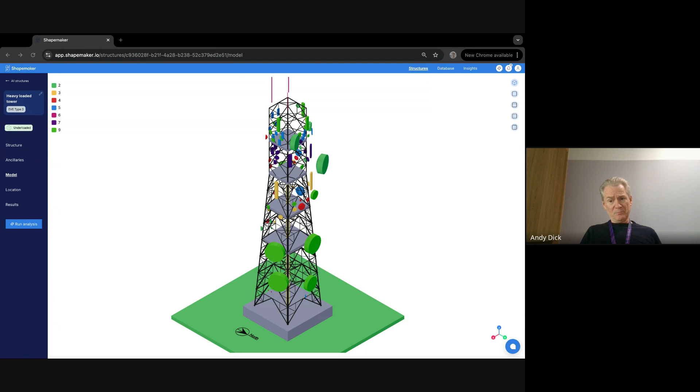So Telia Towers Sweden and Telia Towers Finland have the legacy towers portfolio from when it was a state monopoly. We're a little different here in Telia Towers Norway, because Telia bought Netcom, which was a pure mobile operator. They started in the late 90s building out 2G, perhaps 1G, but definitely 2G technology. So most of the towers that we have are typically under 30 years of age. My background is in radio electronics. I started building towers about 30 years ago, and I've been working with Telia Towers Norway now for a little bit over 2 years.

Perfect. We started with Telia Towers Norway in 2023, as far as I remember, and then recently we expanded to other countries, Sweden and Finland, correct? Yep. So we had some years already in collaboration with each other. Could you please tell us about previous engineering processes before we started our partnership? What did they look like, and what kind of challenges did you have at that time?

Previously, all of our tower documentation was in CAD drawings, and CAD is a very, very useful tool. It's great if you're going to build a car and design it from the ground up. But if you want to be recording where you place antennas on a tower, it's probably a little bit of overkill. You don't need to know to a degree of millimeters where something is placed in a tower. When a contractor installs something, they might be plus or minus 10 or 20 centimeters from where you've assigned them. So that level of detail is unnecessary.

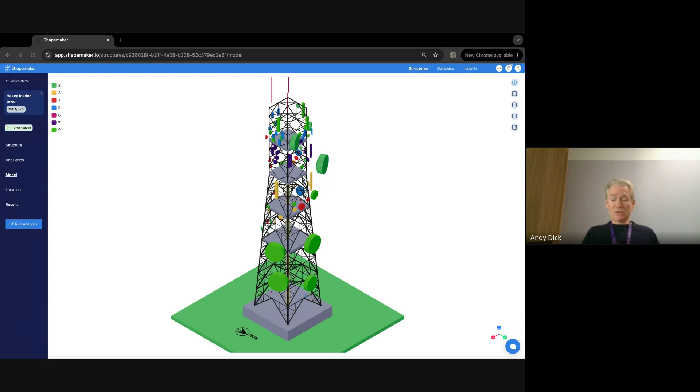When we had strength calculations done, they were done by a local engineering consultancy, and they would deliver a report in PDF format. So then we had DWG files and PDF files, which aren't really useful. They're great when you actually look at that particular project. But if you want to use it as information going forward in modern systems, it's not really useful for us. Correct.

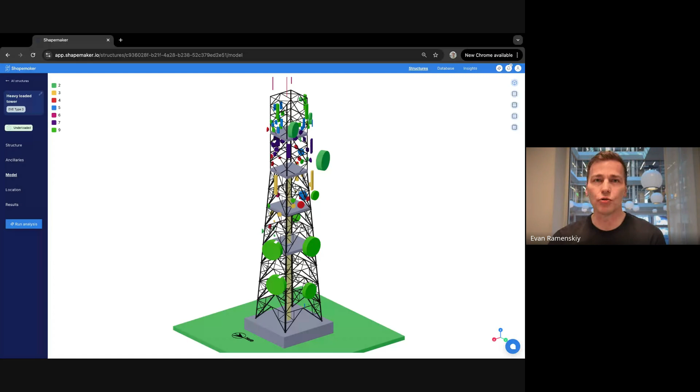Yes, and that's why I was sharing the Shapemaker platform screen with a digital twin that I just opened up. Basically, as you were saying, Andy, in the past the process was quite manual with all this DWG and PDF documentation, and now I'm going to show this digital twin with all these antennas with different tenants marked in different colors right here, and ancillaries or antenna data is shown.

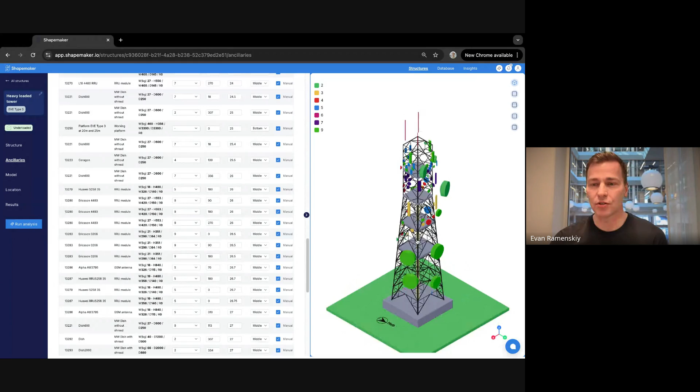The antenna list is kind of digitized on this digital twin, as you can see here. A huge list of very busy, very nice looking structure,

but the impact of the Shapemaker platform when we shifted from this manual digital solution to Shapemaker platform, and also I was wondering what was the impact not only on the company but also on the team? What kind of team you had, and you mentioned that you were outsourcing your engineering calculations to a consultancy, a third-party company. What is the setup now? What is the impact of Shapemaker right now?

One of the challenges we faced at the time that I started was that two of the main mobile network operators here in Norway were involved in 5G upgrades. And as part of that, there were a lot of requests to do strength calculations on these towers. So we were seeing that when we sent an order for a strength calculation, it would take typically 6 weeks before we would get a calculation.

And what we want to do is be very responsive to our customers. So when they send us an inquiry about something, we want to give them an answer within 1 or 2 days, if they can have what they want and how much it's going to cost them. The faster we can be responsive to them, the sooner we can get them actually installed in one of our towers. So that was one of the big changes for us. The advantage with Shapemaker is you don't need to be an engineer to do it.

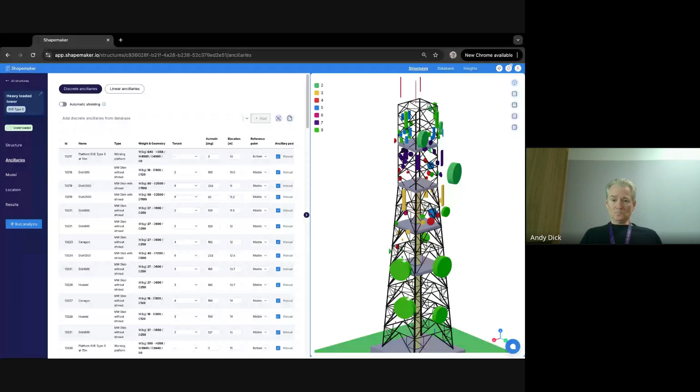Sounds cool. I really like what you said, Andy, from weeks or months down to basically days or sometimes even minutes. It's very good feedback for us to see, using Shapemaker, cutting down the collocation applications and engineering calculations basically down to days, responding to your end clients in days instead of weeks and months. I think it's a big impact on the business itself.

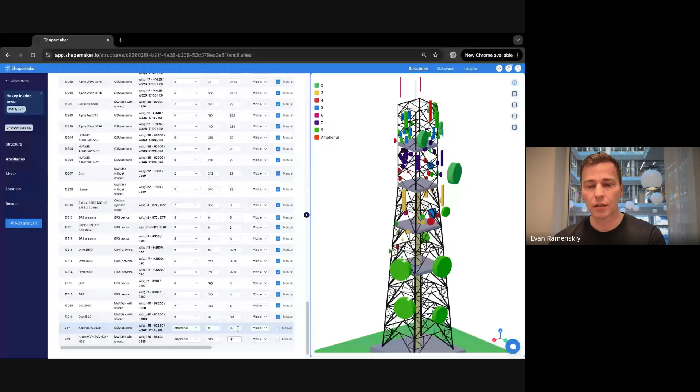And maybe I can briefly show. So this is our antenna tab in our software. What you see here is a 3D model, and we have an ancillary database which you can search and pick an antenna. For example, this type. Let's say we are applying 2 different antennas as a collocation request. We add it to the structure, then it comes into the list at the bottom, and you just need to assign the tenant name, azimuth, and the elevation. And of course, we have all sorts of additional ways of adjusting this ancillary.

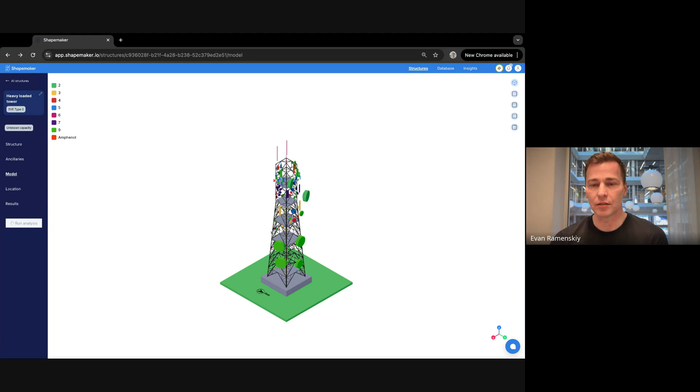And I can even run this calculation, and you will see while we are talking, it will take basically seconds. So that's what you just highlighted. I just want to show how easy it is. And in addition, Shapemaker is API-ready software, so even this ancillary can be implemented not by hand, but through API integration with other internal or external platforms. So a very interesting overview that you highlighted, Andy.

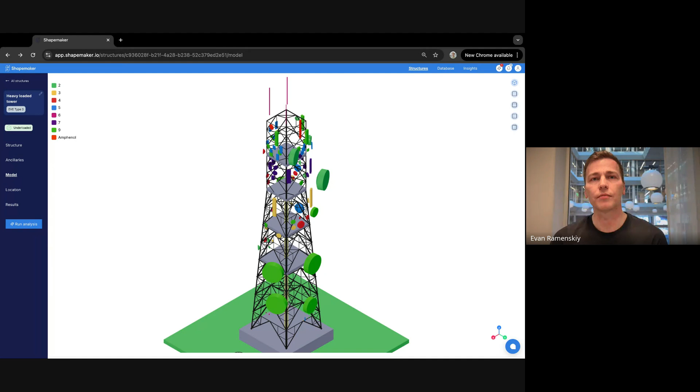And okay, so the time has been reduced dramatically, answering these requests and building new structures or updating existing ones. But how did it impact the business, and have some business metrics been improved? If you can just in general highlight some business metrics improvement in Telia. I think one of the most important benefits for our customers is that we're more responsive to them. We can give them an answer much quicker than we could before.

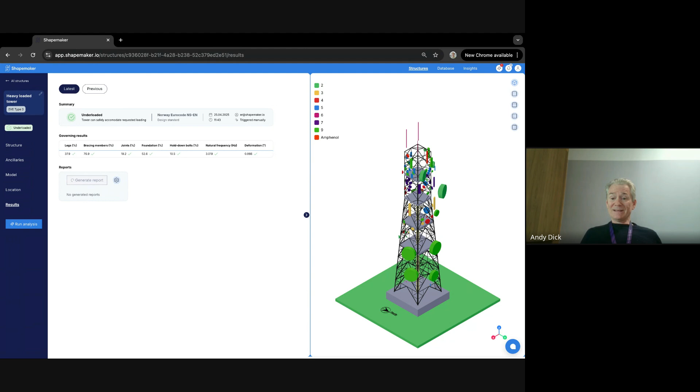What are the other benefits? Well, I mean, we have better information about where our equipment is. One of the challenges in a tower company is that if there is an antenna installed that is in the wrong place and you haven't identified that, you might offer that space to a customer.

Now they go out, they go to install it, then there is waiting time, finding out maybe from the subcontractor back to the customer and back to us, hey, what are we going to do about this? And this is a financial loss to the customer. So if we can eliminate that by having a better overview of what we have on our towers, that's going to translate into lower costs for our customers as well. Mm-hmm. Correct. That's very good.

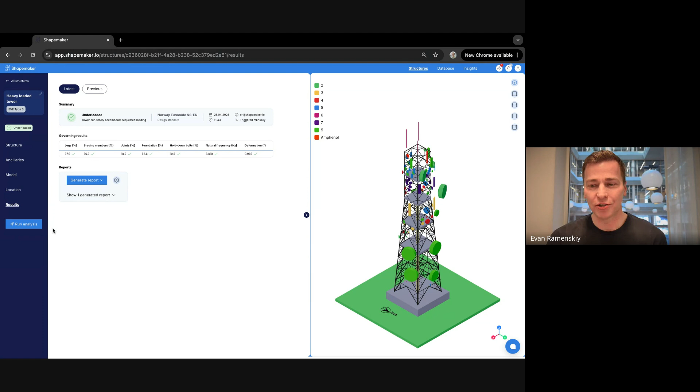And while you were talking, I ran this analysis, basically a full, complete structural analysis with these 2 new antennas that I attached, imagine it was a colo application. And here in Shapemaker, you can see the results and the overall status of the structure, saying underloaded, so basically passing the analysis. And I ran the structure previously, and you can see the history of our checks.

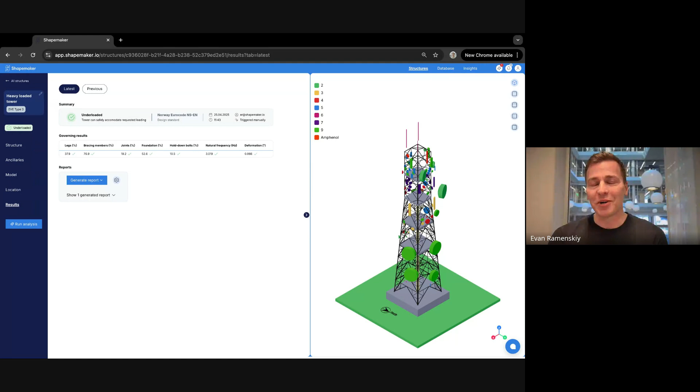And in the beginning of the history of analysis, a few days ago, the structure was overloaded. I'm just highlighting what you are mentioning, Andy, for our audience to see the capability. And one additional question that I'm very interested in is your favorite functionality in Shapemaker, because we have quite a lot and there is no time to show everything. But if you can highlight one or several.

I think there is one important thing that Shapemaker does that has made a big difference for us. We're very, very conscious when we build a site. Our expectation is it's going to stay there for 50 years, and we want to make sure that that tower is not overloaded. So we want to take all the available information in when we do that. One of the things that wasn't done in our previous calculations was the orography factor. And if you don't know what that is, you can have a look on Shapemaker's blog. It'll give you some in-depth information on that.

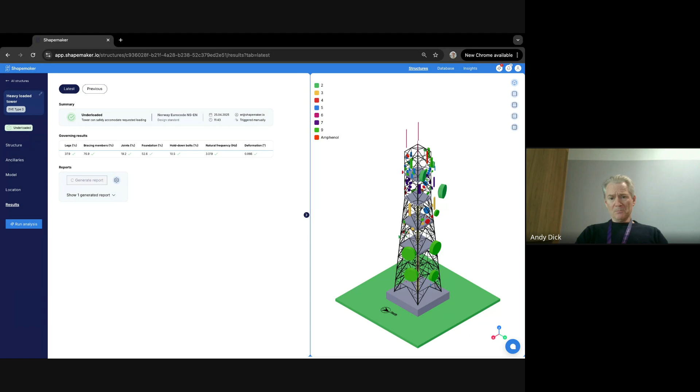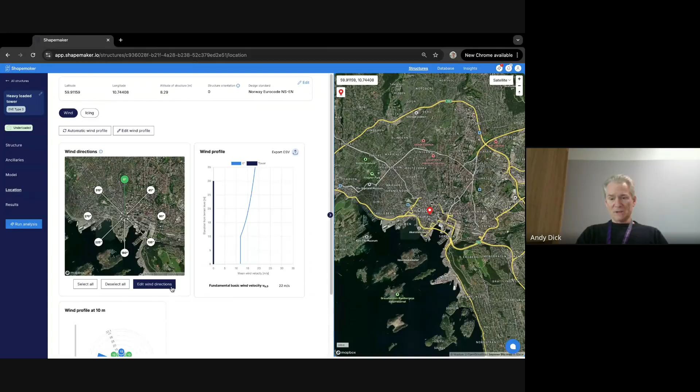Basically, it's about the terrain and how that affects the wind coming from various directions and the speed up of the wind. And the reason it wasn't done previously was it's actually a complicated mathematical process to go through. I did it one time following the information that you have on your blog to see what is this calculation, how does it work this out? And it took me a long time. Shapemaker does it instantaneously. It's just included.

If I have a look, I see you've got up the location data there, and yes, it'll tell me what the terrain category is from 8 different directions. It'll tell me what the orography factor is, and that can make a big difference when I design a site. If I didn't have the orography factor included, I might conclude that the tower structure was sufficient for the antennas that I'd planned there. When I include the orography factor, I'll find that it's actually overloaded.

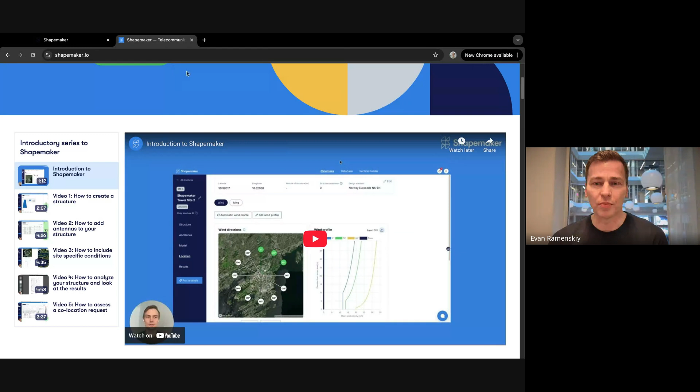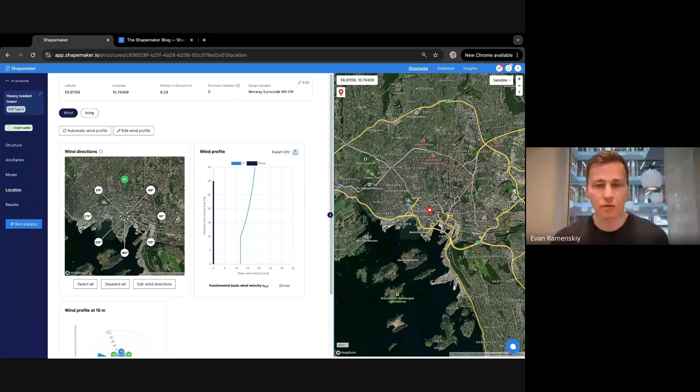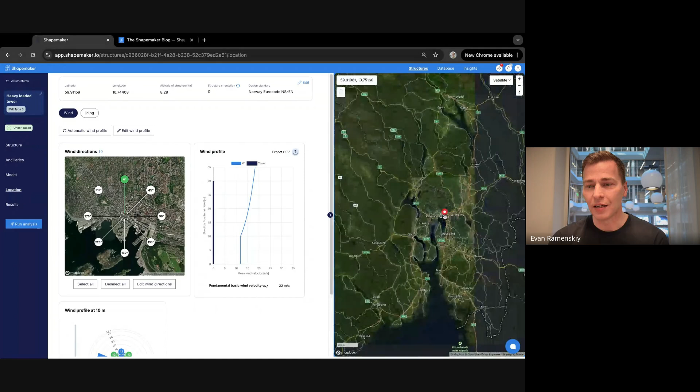And yes, what you highlighted basically is the site-specific analysis, which takes a lot of time for consultants or engineering companies or for our companies to analyze this site-specific wind, topography, exposure, and we do it in seconds. Maybe I can show quickly. At the moment, the structure is, of course, a demo structure located in Oslo, but I can move it to a very challenging terrain. Let's put it somewhere in the mountains or near the fjord in Norway. And what I need to do is just click automatic wind profile calculation with this new location.

And what we do within seconds, which probably takes days if you do it by hand, we analyze exposure, terrain category, and orography, as you highlighted, and basically also bring the wind speed. And we can investigate different directions. Let's say I highlight these 3-4 wind directions, and I can see the wind profile, and the difference in wind load is quite dramatic, from 30 to 37 meters per second.

So our calculations are very precise. We account for this different wind loading in different directions, which engineers probably usually don't do. I worked as a consultant in the past, and I usually applied the most critical wind load around the whole structure, which is a very, very conservative way of calculation.

But very interesting. I also believe, and I agree with you, that this functionality is very powerful, and it can unlock the potential of the structure and generate more, let's say, revenue for tower companies if you investigate site-specific analysis and then hopefully have a bigger capacity. So very interesting to hear your opinion.

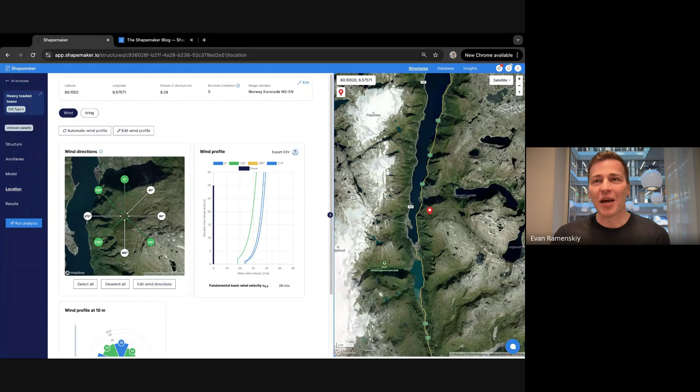And we also have this functionality called batch analysis, which is quite a new feature. Have you been able to perform batch analysis? How would you describe it, and how is it useful for the operations at Telia?

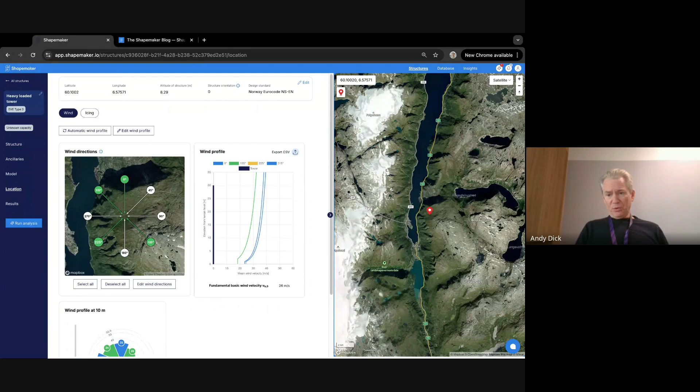This is a really useful function, because once we've put all of our structures in Shapemaker, I can then get Shapemaker to reanalyze all of the structures, and I can just tell it to do a batch analysis before I go home. I don't know how long it takes, but when I come back in the morning, they're all reanalyzed.

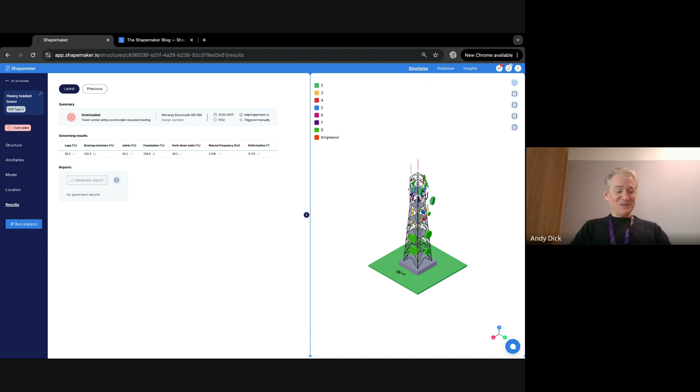And I had a situation where I had one ancillary from a customer, and I found out that the dimensions we'd been using were actually incorrect. So I went into the ancillary database, updated the dimensions of the ancillary, and then I simply ran a batch analysis of all the sites. Whereas it wasn't really an option under the system that we used previously.

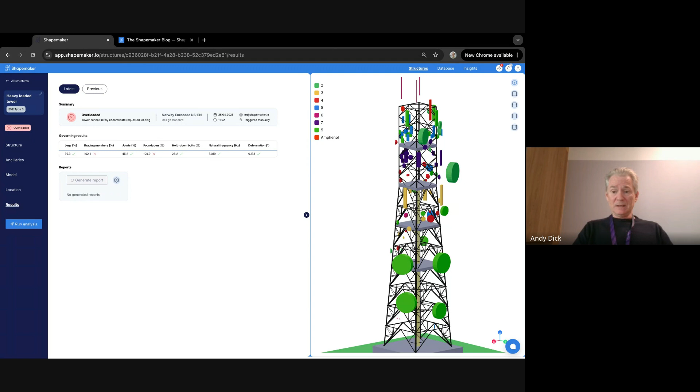And it can be very useful if, for example, you have a customer who is using an antenna, and you've been basing it upon the dimensions of that antenna, but maybe they come back and say, we've got vortex generators on this antenna. You can then remodel it with the effect of the vortex generators, and then rerun your portfolio. Yeah, that's very cool. I completely agree.

Sometimes there was a mistake in the antenna specification and you used completely different dimensions of this antenna, and then suddenly you got a spec which is correct. Then what you need to do is go to the ancillary database, the antenna database, and pick the antenna you are updating. For example, for this antenna, you can change the geometry and save the changes, and all the structures where this antenna was installed will be updated.

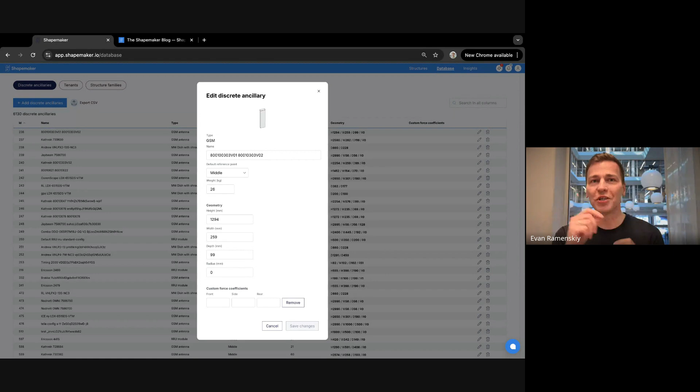So you don't need to go from structure to structure and update the same antenna, which, depending on how many structures we are talking about, can take forever. And as you said, with vortex generators, very detailed wind tunnel results come in for some challenging antennas. Then instead of a geometry-based antenna specification, you can specify force coefficients from this wind tunnel test. You can put the forces directly and again save it and update the whole portfolio. So that's a very good insight.

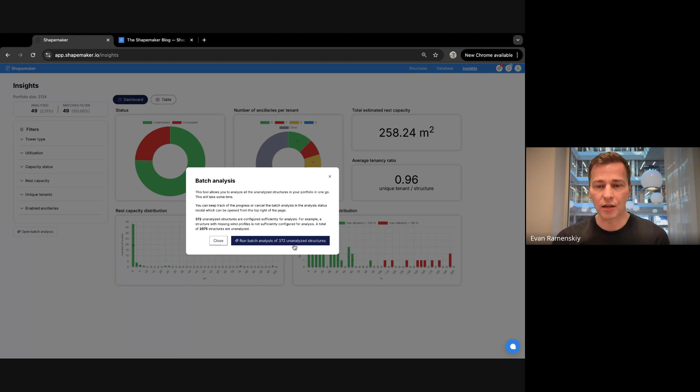And I wanted to show we have this tab called Insights, and here's the batch analysis, one way of triggering batch analysis. And this Insights tab, briefly to mention, shows metrics on the entire portfolio within your account.

Okay, very, very cool. And I have another question about data onboarding. Can you quickly share your experience with data onboarding? Because it's very difficult or challenging for some of our clients to go from one software to another, like Shapemaker. This transition can be very challenging, but we provide some type of data onboarding, and I just wanted to ask what your experiences are.

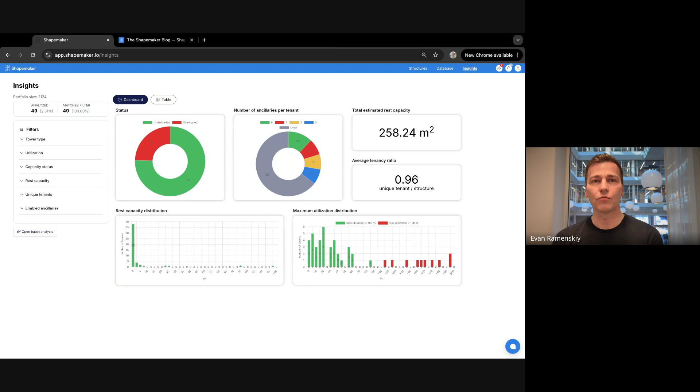Well, this is something that you provide now. I don't think you were providing it when we started out, and I don't think what we had was really suitable for onboarding. So we took the opportunity to actually do an audit of our sites and do some quality checking of our data.

But we were also talking previously about digital twins, where some operators are looking at getting digital twins. And I was thinking about this this morning, actually, because I had a site that I was looking at recently where we made an offer to a customer where they would have 6 antennas and 9 RRUs.

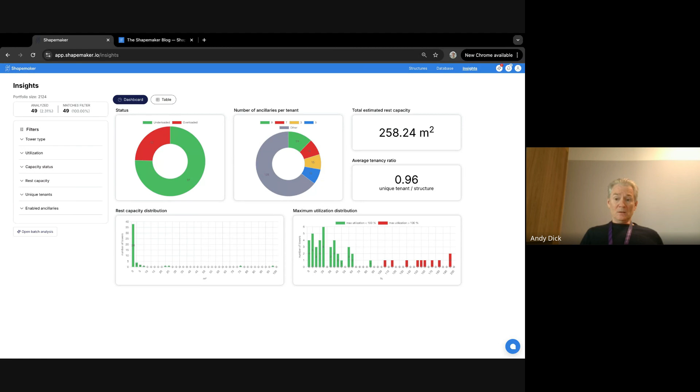They've done their installation. They've installed 3 antennas and 6 RRUs. Now, that doesn't mean they're not going to install the other equipment at a later date. Now, if I went and got a digital twin done of that tower, it's going to pick up what's actually there on that date, but it's not going to pick up that I've got space rented out to a customer. And if the customer installs their equipment tomorrow, next week, or next year, it doesn't really matter. That space is reserved for the customer and they're paying for it.

The other problem with a digital twin is it's only any good on the day that it's done. And if you have a lot of activity from multiple customers at the same time, you then have to update that information. It could be that they go out and do a digital twin today, but the installers go out and actually install equipment tomorrow. So your digital twin is already outdated. You still have to physically, manually update that information with the processes you're going through at the moment.

Very, very interesting. Yes, absolutely. And talking about this, being able to update your digital twin or keeping the data and ancillary data up to date, we also provide API integration at Shapemaker. So we basically integrate into portfolio management platforms to cut the process of updating the data you were just describing as much as possible.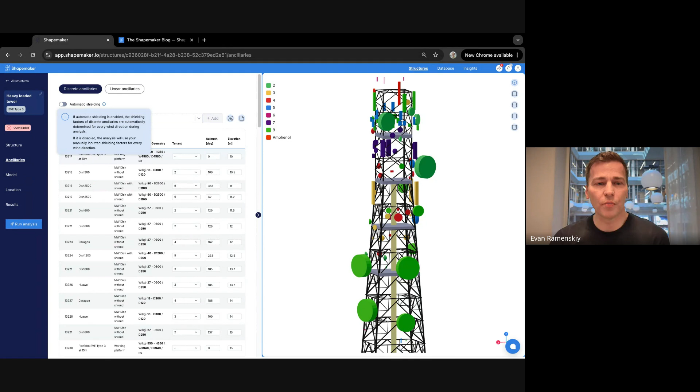And basically, you don't have to worry about all this. For example, this is a very good case, a heavily loaded structure with lots of antennas that shield each other. So by just triggering the toggle, all the shielding will be automatically calculated for you.

And you also mentioned the communication, which of course we started on in our early stage, and we delivered a lot of new features, as you said. And we also developed this chat where actually it's not a chatbot, but you can chat with our engineers, IT developers or telecom engineers directly in Shapemaker.

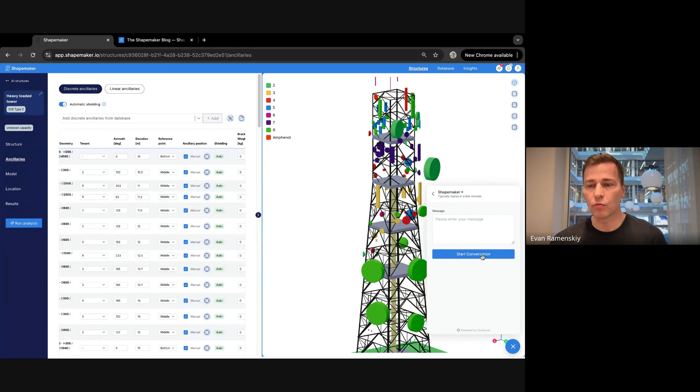So if you are wondering about something, or you don't know how to use some functionality, you can always ask, and we immediately respond to the users.

Okay, I think that's really good. We are on time, and then maybe we can open up for some questions, and I can ask Marta-Liisa to pick a few interesting questions from the chat. Yes, we have received about 5 questions. And so we have 2 questions about the wind.

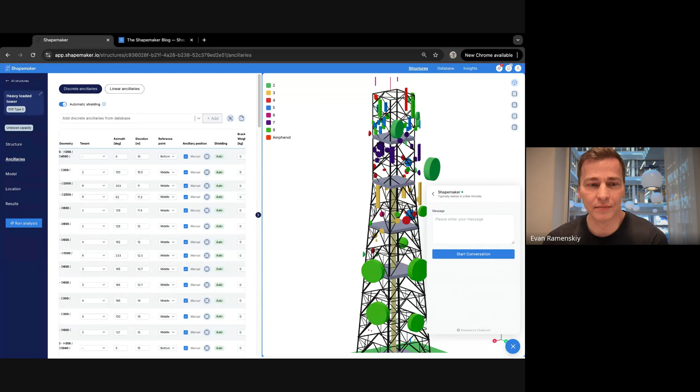Is it limited to Norway and Europe, or do you support wind and terrain data for other parts of the world as well? That's for you, Evan. Yes, that's a perfect question. So our main geography is Europe. We support all European countries, and we developed Eurocode with annexes from different countries in Europe.

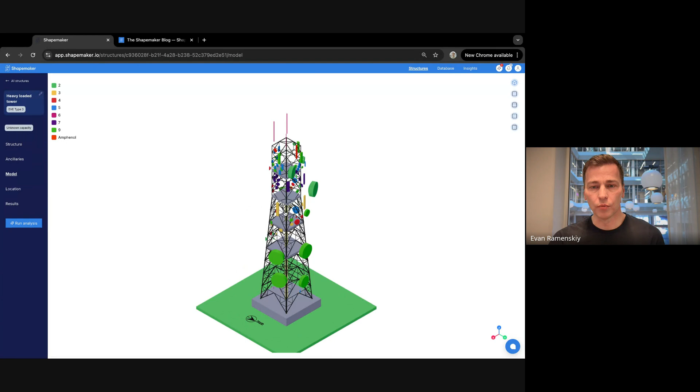So the wind is automatically determined based on the location of your structure. When you pick the latitude and longitude, we know the exact basic wind speed, and then on top of that, as we discussed, we do this site-specific analysis. And we are also going to expand into TIA, the American standard, and the Australian standard later this year.

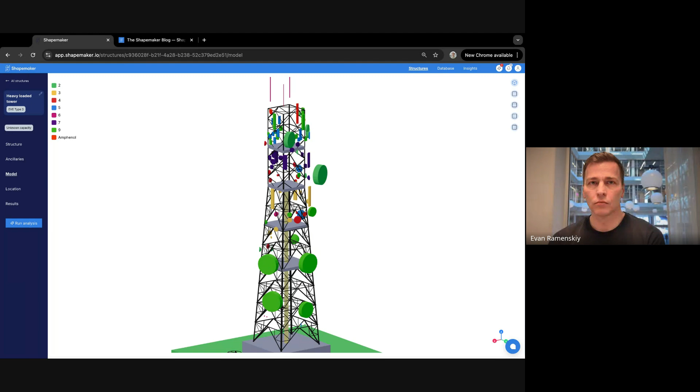Yes, thank you. And we used multiple directions calculating the wind. Is there a reason why you have limited it to 8 directions? The UK has moved to using 12 as standard. Yes, actually, that's a perfect question. You can edit the wind direction. You can add more than 8, as many as you wish, and you can adjust the directions themselves. So we are not limiting this part.

It's up to you, but we are also following the requirements of the Eurocode. So if you choose, let's say, like Marta-Liisa highlighted, the UK annex, then the wind directions will be per the UK annex to the Eurocode. So we are following it, but we allow the user to add more wind directions and adjust them. So full flexibility on that front.

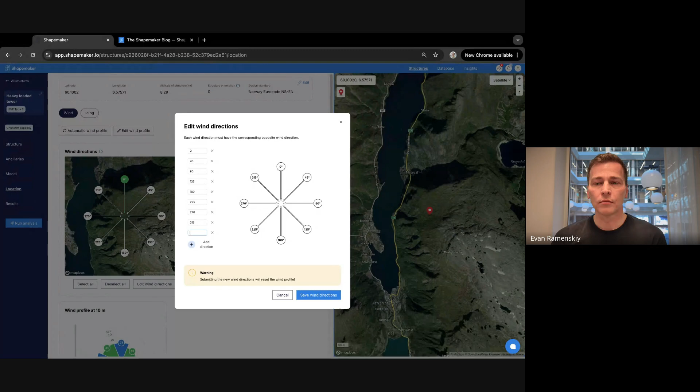Would you please describe ice calculations too? Yes, icing calculation is very challenging, of course. Maybe I can highlight the different annexes to the Eurocode. If I choose, let's say, the German Eurocode, the calculation is per the German standard. And we ask the user to provide the ice thickness and ice density, and the rest is taken care of by the software. We calculate the icing.

But this is a very big topic. I will just very briefly say it like that. And we are happy to set up other webinars on very specific topics, and one of them definitely can be icing calculation, because it takes quite a lot of time to explain.

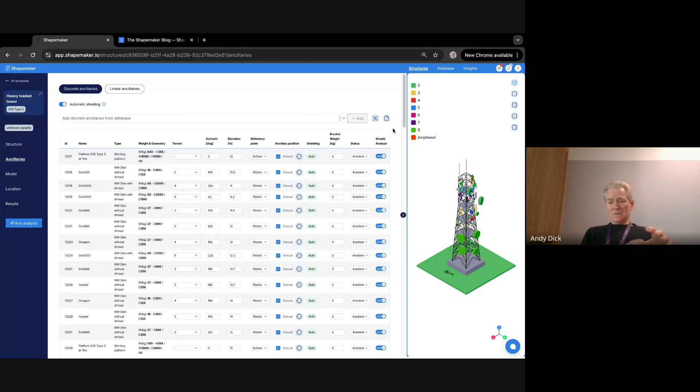Thank you. And then we have a question to Telia. How does Telia document customer equipment? Formerly you showed the ancillaries, and this solution only provides tower and antennas. This question is to you, Andy. We document customer equipment in Site Tracker. Typically when we get an application from a customer, they will specify which equipment they want to install, be it in the mast or in the shelter.

They will tell us what their maximum power consumption is going to be, how much battery backup they require, and how many cables they're going to run from the shelter up to the mast. And all of that information resides in Site Tracker.

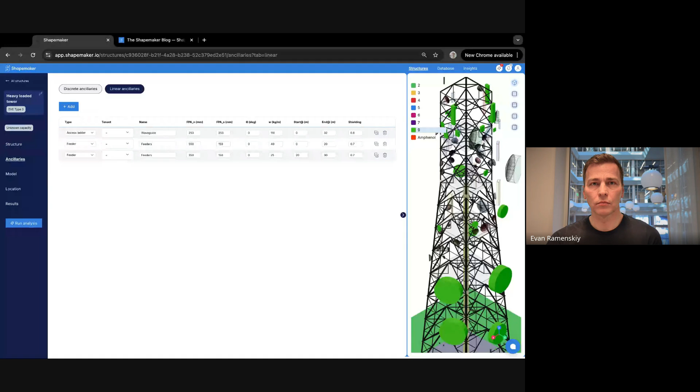Okay. Yes, thank you. And so we also have another question about data onboarding. Do you not add antennas to the system from data sheets, Evan? If you can say something about the data onboarding. Yes, absolutely. That's actually a perfect question.

So in addition to API integration that we highlighted, bringing this data, and as Andy just now said, bringing the data from Site Tracker, let's say, via API, we're also able, as I'm showing here, to import and export data from spreadsheets. So, for example, if you track all this ancillary data in your spreadsheets, or if you can export from whatever software you're using into the spreadsheets, you can basically import or export this data from your spreadsheets directly.

So you don't need to populate it by hand. You don't need to search our ancillary database. You just click import from CSV. It's basically like an Excel spreadsheet format. And in one click, you basically bring it into the system, as easy as that.

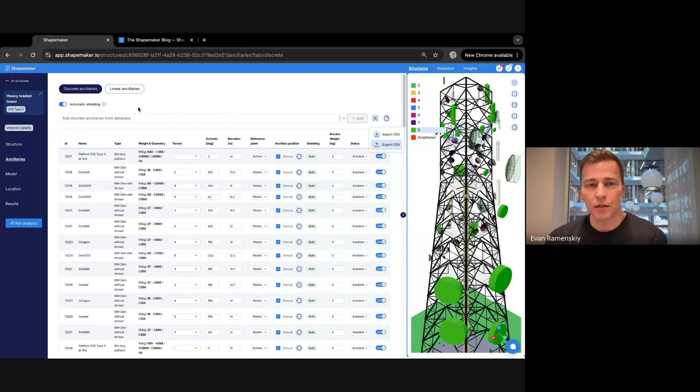Yes. And we have a final question about the ancillaries. Does the system show the cables connected to each antenna? Yes, what we are showing at the moment is cables. You can see it in the 3D view. It's a big cluster of cables right there within the tower body, and you can specify what is the starting point of your cable and what is the end point. For example, end point at the elevation of your antenna, which you are connecting with a cable.

But of course, maybe you are talking about the so-called tails. We are not showing the tails, basically from this big cluster of cables to the antenna itself. No, we are not showing it, but we are really interested in all this feedback, so we can actually implement something like that in the future.

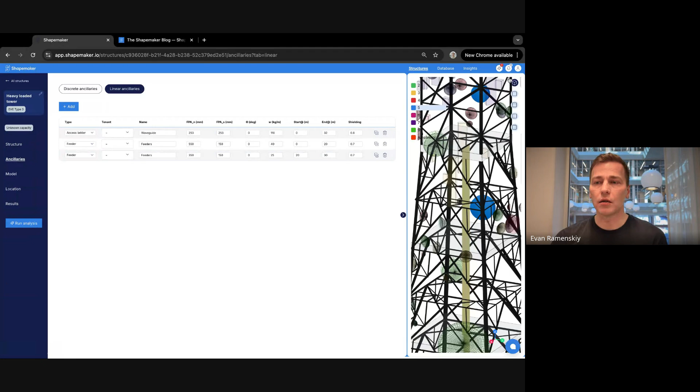And that's why we really enjoyed working with Telia, because every time we hear feedback, and it's so much very useful feedback like this one, we are working immediately and implementing this type of development. For example, I clicked on this icon. Here we list the top 3 recent implementations that we bring. And as you can see, in this case, every month we pushed new developments.

So for example, this month, customization of hold down bolt, last month, automatic shielding that we covered in this discussion. And before that, customized wind directions that we also actually highlighted today. So that's the power of working with us, that we are not inactive, we are really, really active, and we are bringing more and more functionalities every single month.

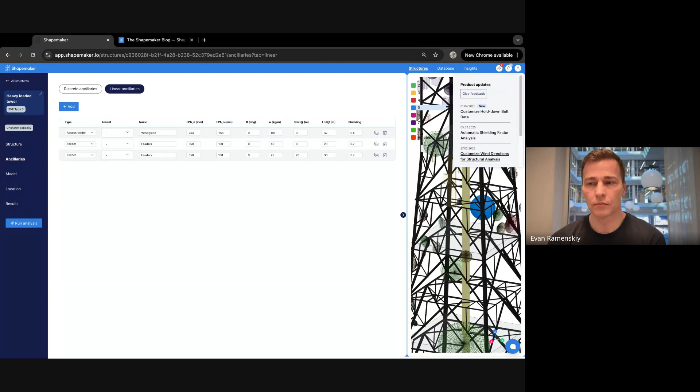And I think we can take a last question regarding customer equipment. Is Shapemaker planning to add some functionality for TowerCos to add it directly in your tool? What does it mean exactly? Probably the ancillaries added directly into Shapemaker. I'm not sure I fully understand, but ancillaries, as we were showing, directly from maybe the client themselves being able to add it. Yes, that's okay. I think I understand.

So if the client, let's say the mobile network operator, can add an ancillary directly, the answer is yes. We are working on different user profiles. For example, it can be a user profile as a tower company engineer who works in a tower co, who owns the structure and who can do everything within the structure.

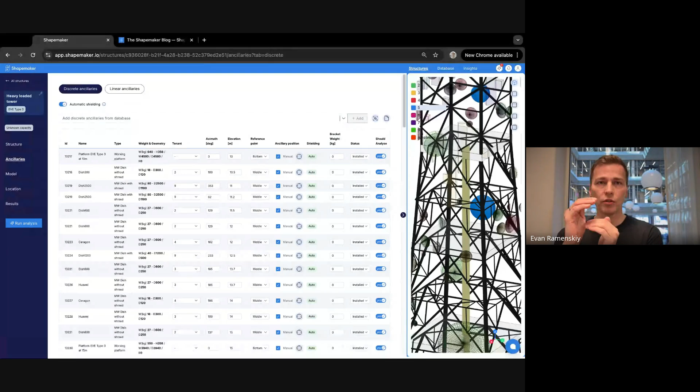But we're also working on the profile of a client, like a mobile network operator, who will be able to log into the specific structure and see and install the colocation application, and then click on submitting the request for the owner of the structure to approve it or reject it. So it's not possible yet, but this is one of the features we are working on, these different profiles, to completely speed up the process and remove the bottlenecks.

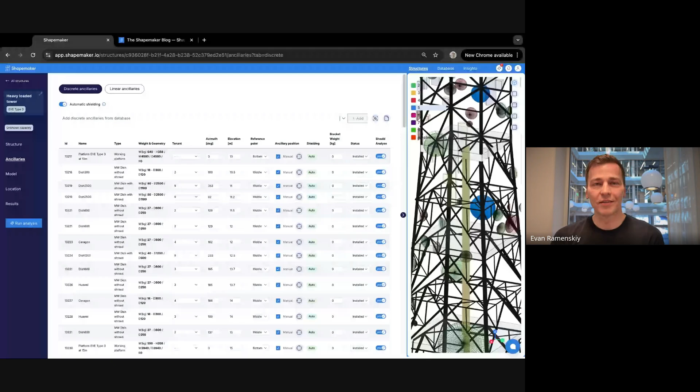And also part of these profiles will probably be maintenance teams, structural engineers, power management teams, and mobile network operators. So the majority of stakeholders in telecom business. Okay, I see an additional comment to the question, meaning cabins, shelters, adding rooms, etc. with TowerCos. Yes. At the moment, as you can see, we don't have the shelters, but we are also developing it. So basically, the shelter and the equipment in the shelter will also be released. It's on our roadmap of development.